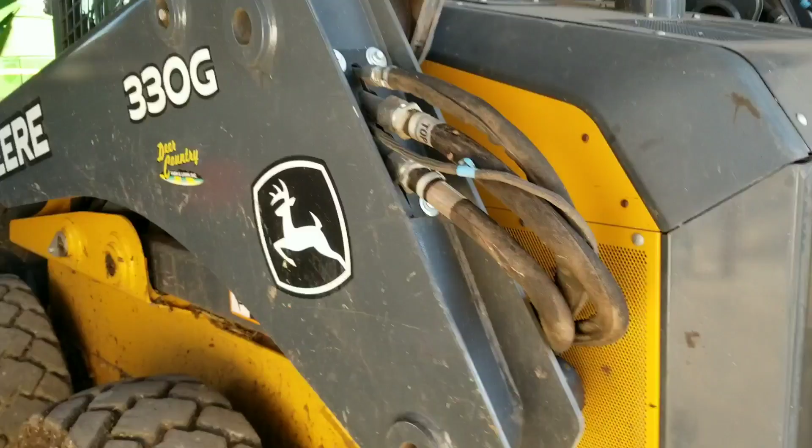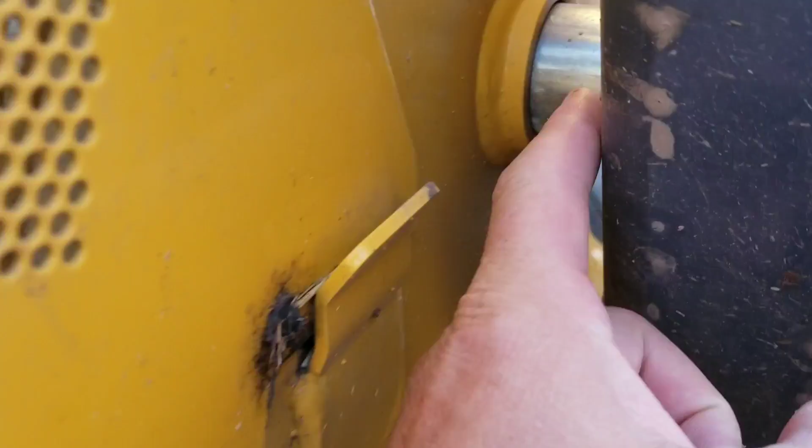Okay, this is all about the John Deere 330G. I have the loader way up, I have my lock on, and I'm going to show you how to take the shields off. We're going to blow it around here a little bit. The lock's on so it cannot come down, so we want to just take it a little easy there on safety.

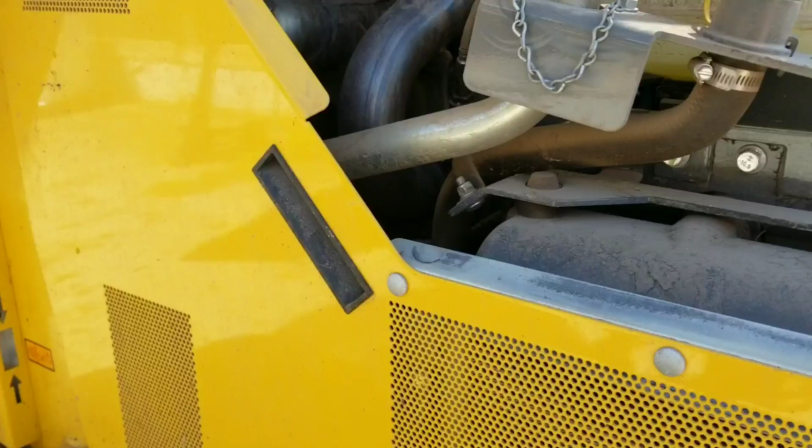So this is a handle here, I guess. We're going to pull that first shield off, see if we can locate the filter here. So you just want to grab that and pull it up. I don't have any help here right now, so I just have to pop it in and out.

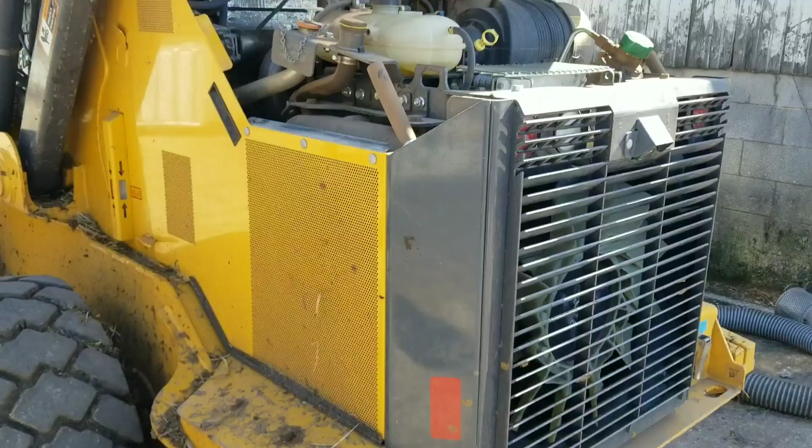So I hope you enjoy this video as we go along changing the engine oil. This is my first time doing this. It should have been done a little bit earlier, but as busy as we get around here sometimes, it's hard to get everything done.

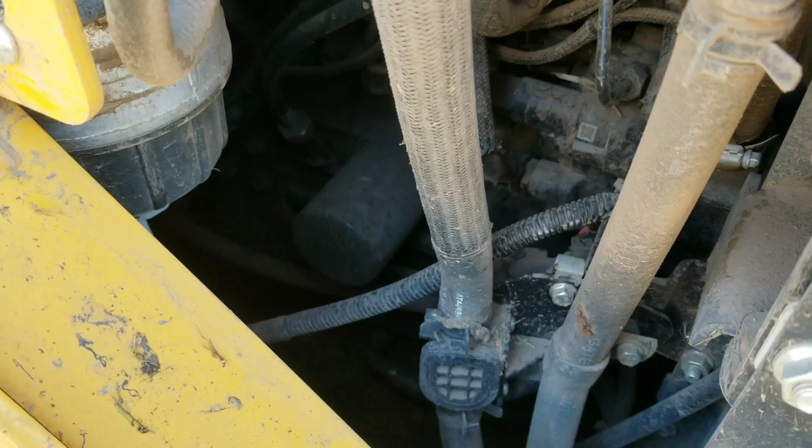Okay, you can see the engine oil filter there, it's right off the side of the motor. I'm going to remove the pan. I'm not sure where the engine oil gets drained out yet, so there's a fuel filter there, some kind of filter system there.

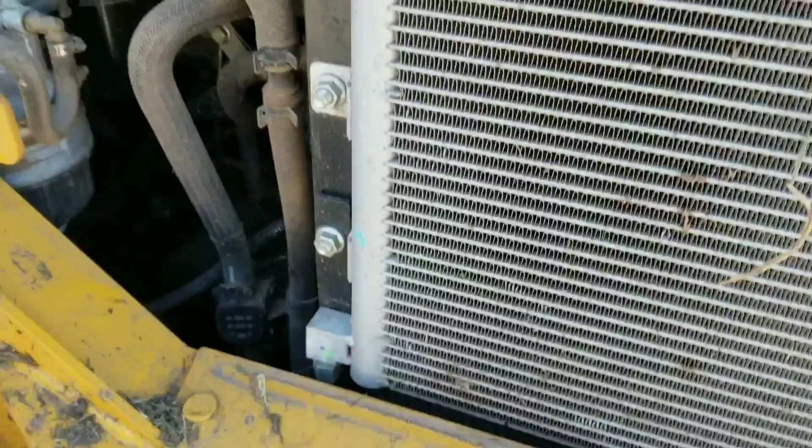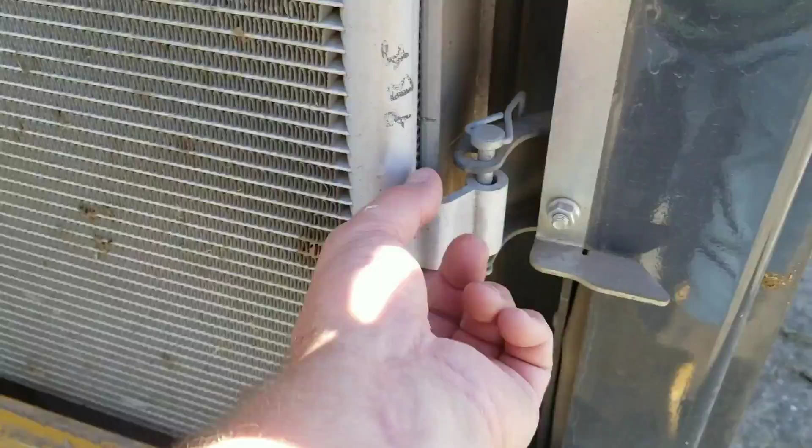Skid loader definitely needs a bath. So that was easy to figure out there, just take the shield off. It opens up nicely on both sides. These do swing out and stuff, there's all kinds of things you can do.

This shield here we take off to check up on a couple things here. I'm going to pull that one up too, just for any cleanup. Overall, that filter is not that hard to get to. Reach right in there, got lots of room.

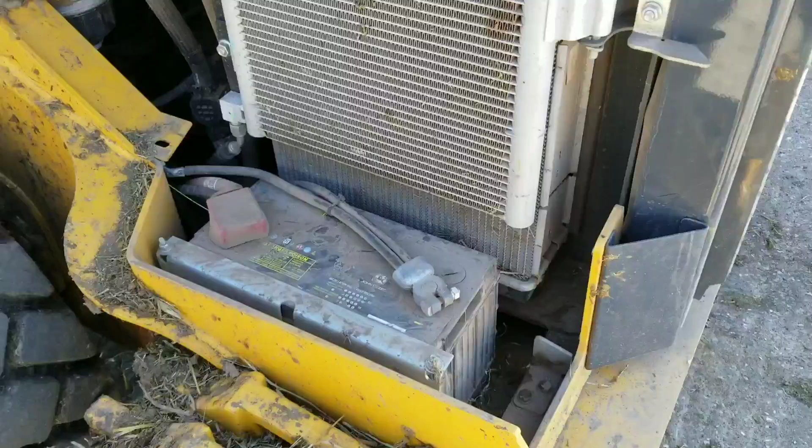So under that shield was the battery, and I'm going to blow everything off, clean up there real good. This is one where you can check and just unscrew these caps, check the levels. Being a newer machine, I don't think we need to do that yet, but we're going to go ahead and clean it up a little bit.

Get underneath there, see where we drain the oil out, underneath the machine here, and open it up.

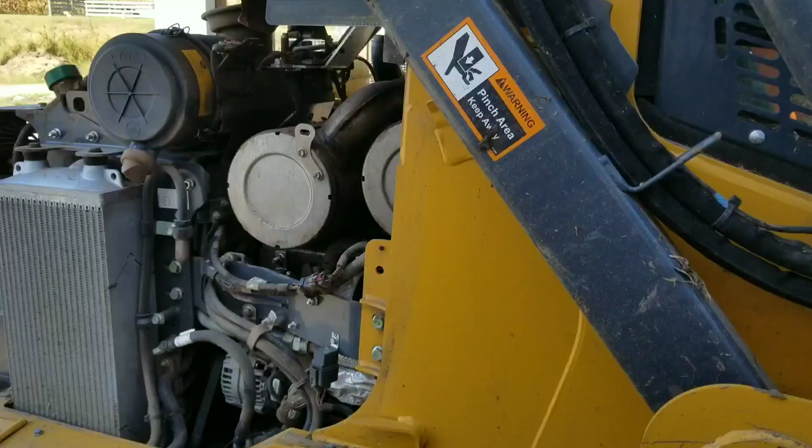Okay guys, I'll bring you back out here a little bit before I drain the engine oil. I did run it a little bit. This is my first time on this John Deere 330G skid loader, changing the engine oil, cleaning it up, blowing it out, opening it up, just kind of learning where everything is. Very interesting where I'm finding things.

Some guys would grab a book and sit there and look at it for a while. Not me. If it's just a simple oil change and I'm not doing big repairs, just cleaning it up, checking the filters and stuff like that, just making sure everything's cleaned up for the hours. They have a chart inside the skid loader that I go over for the things that need to be done at this hour mark, and check things out.

Have the air hose out here with cleaning it up. While we found the engine oil, I took the bottom oil pan off just to help clean out any extra oil that drips off of the oil filter. And here's the fun part.

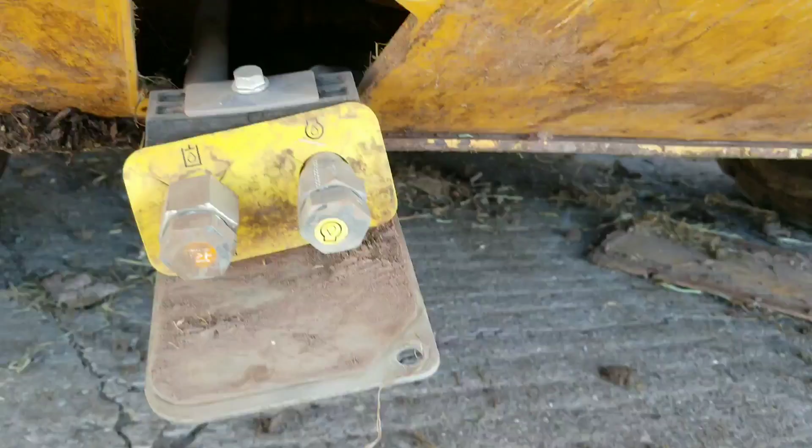You just pull these two screws out here, and you've got two drains. One's for the engine, one's for hydraulics. So everything comes out. I set my pan underneath there.

We're going to drain the engine oil out. Hydraulic has a square box, engine has a round one like an engine on it, so you know not to take one or the other one out. But it's simple to pop that off.

Get all your fluids out here. We'll let it sit for a while and let it drain completely out. And then I'll take some ether and clean up things so the oil doesn't stick in the dirt and stuff, and put it back in there.

So we're going to take this cap off. Get two box wrenches, yep, 15/16 to 24 - probably a 24, but a 15/16 should work. So I'll go get two of those in the shop, start draining engine oil, pull the oil filter, and get another drain to see if any oil comes out.

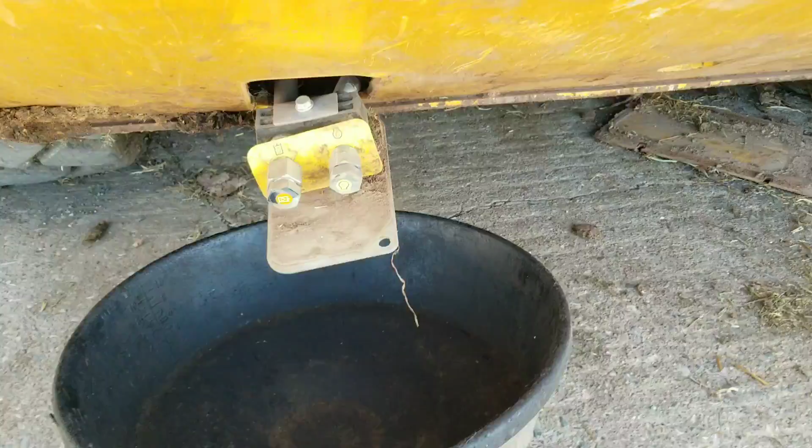The pan lays over there, I'll clean that up before we put it back on, and oil the bolts up and stuff so they don't get tight. Did blow the battery off, nice.

And then we can open a couple of these while we're waiting and just check. Like I said, I don't think it's necessary at this many hours, but here's where we want to put our engine oil in.

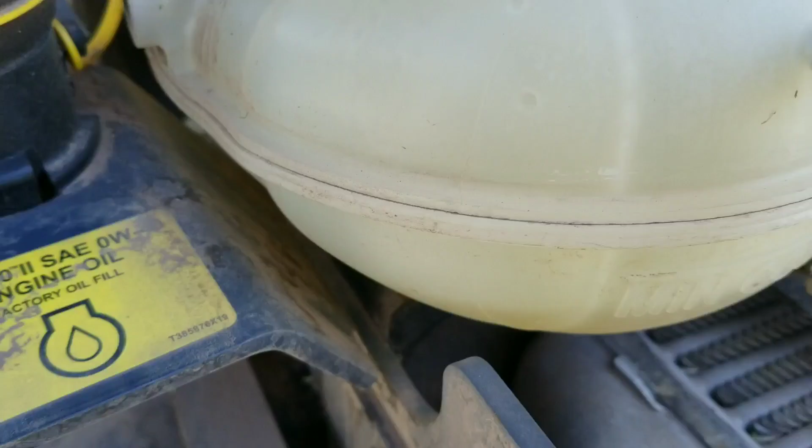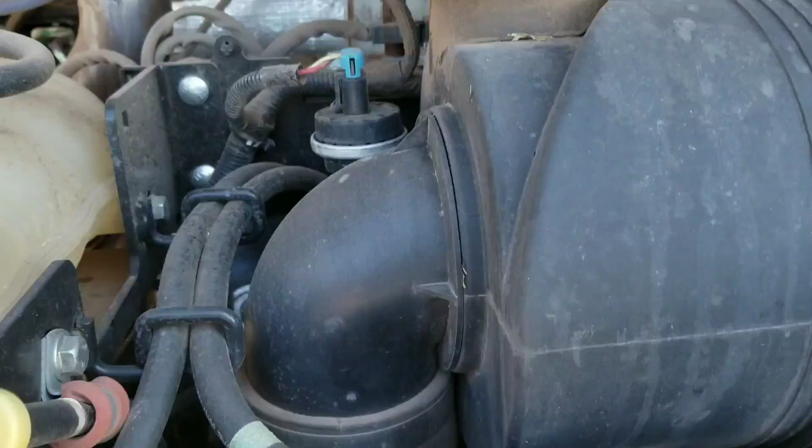And then they have the hydraulic oil fill right here. Everything's nice and easy to check. Here's the drain, or the dipstick, for the engine. But yeah, very, very nice to work on.

So let's get this draining for a while and we'll come back, talk a little bit more as the fluids come out.

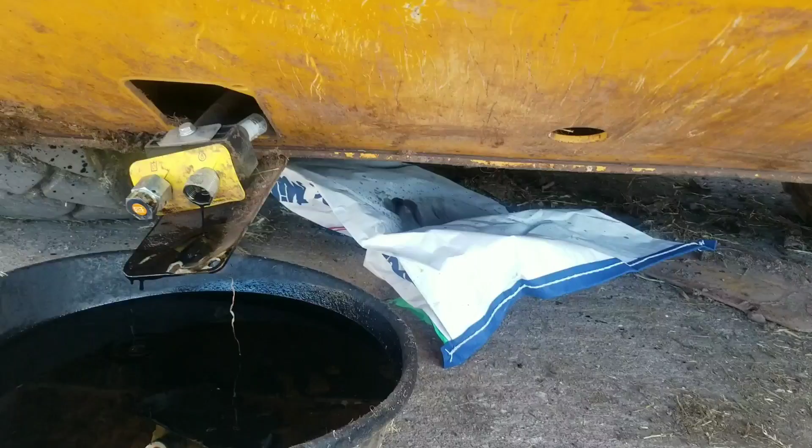Okay guys, well, we're getting the engine oil out. We'll let it drain here for about a half hour. Some people say it's not necessary, but I spend enough money on equipment so I can do what I want, I guess, right? Yep.

It doesn't hurt to get it all drained out of the pan. We'll put some actual clean oil in. Some say that's a waste of money too, but I got the new engine filter on there. You can't really see it there too good.

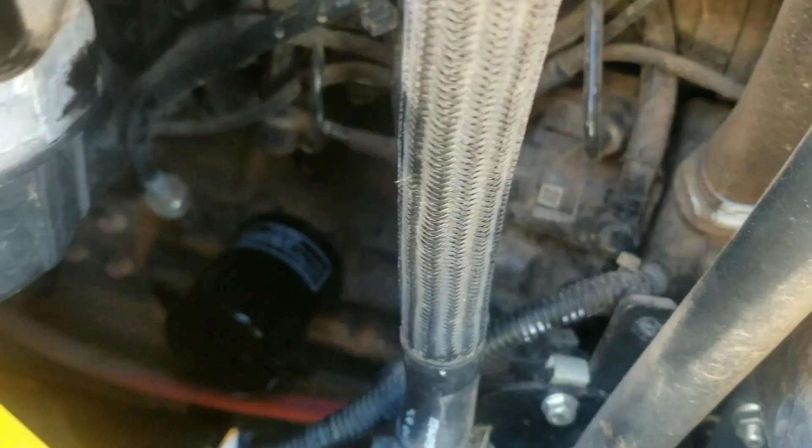I have this handy dandy little thing here. It expands for the filter, goes on there real nice. Has little magnets in here and holds it on. It was pretty tight.

This engine oil filter just says put some engine oil on the surface of the gasket, then turn it once it comes tight, turn one extra turn, which gives it about 20 to 24 pounds of torque on the filter. So, and then they say fill it up, check it again for leaks.

Some guys will put old engine oil on the seal. It doesn't say old engine oil, it just says engine oil, and it doesn't say clean oil. So, but we put clean oil on the seal.

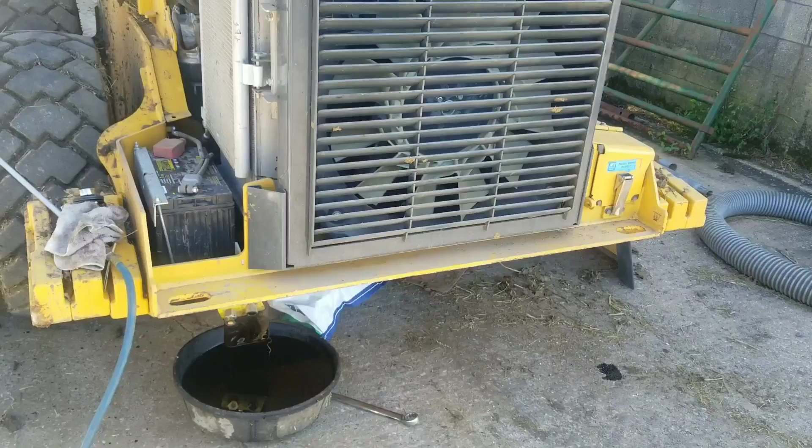And so we'll let that drain here for a little bit. Go get a tea, and it'll be about done draining. Then we'll put some fresh oil in it, just kind of flush everything out. Just dump it in there.

And again, I know some will say you don't need to.

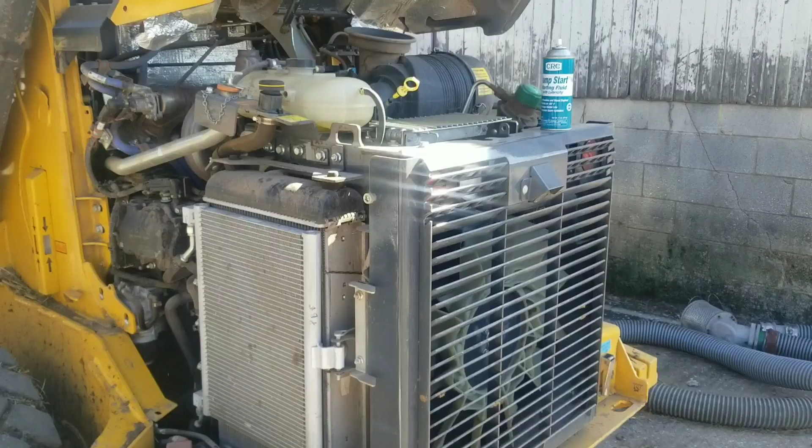So let's go get a drink of tea and come back, flush some new engine oil through it. Not much, a quart or something like that. And just the way I like to do things - I'm really fussy. Keep things clean, and it'll last a lot longer.

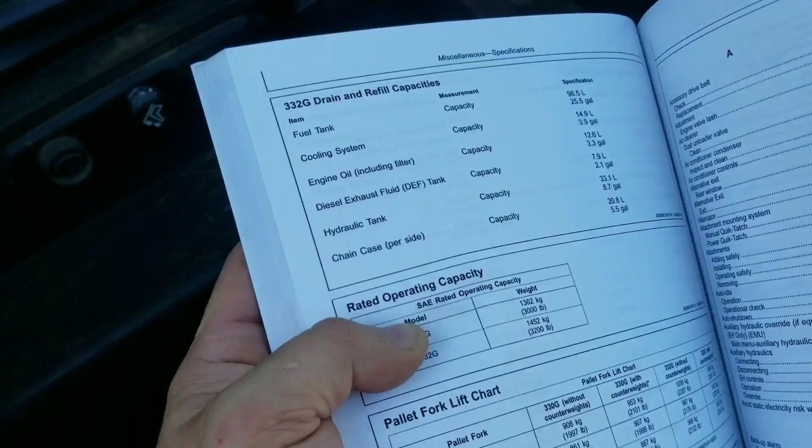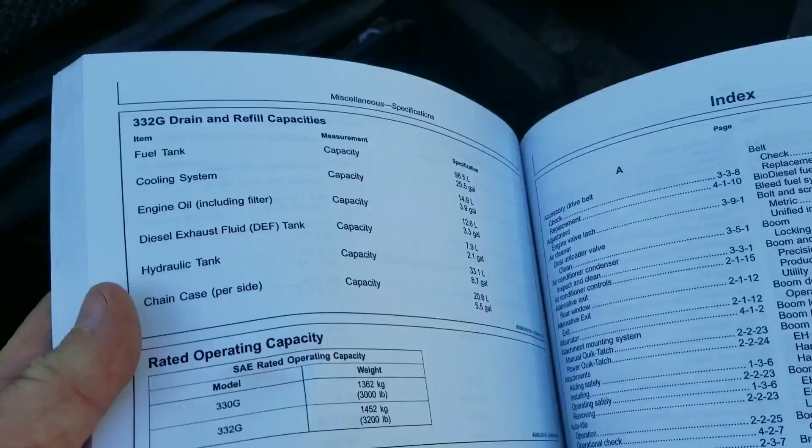Okay guys, sometimes you do have to pull the book out. I wanted to see what the engine capacity with filter is on this engine. The 330... the 332's capacity is 3.3 gallons. I gotta find a 330G.

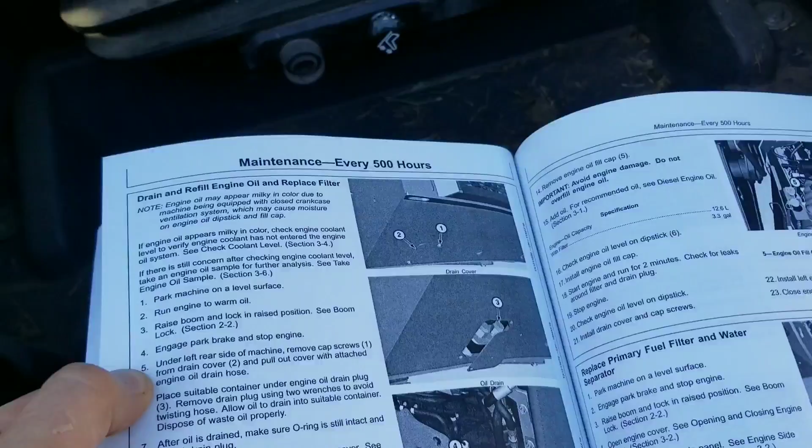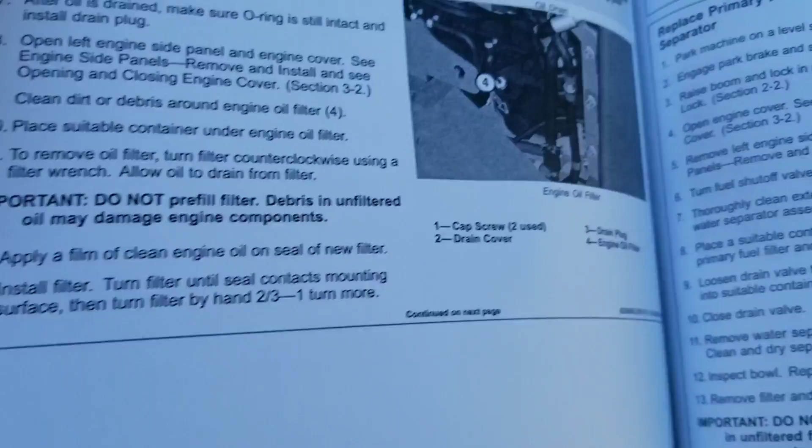So in the book, maintenance every 500 hours to change the engine oil. They tell you to remove that plug - there's the drain plug, drain it. Pretty much what I figured out on my own. There's the fill and the check. 3.3 gallons. Let's see here.

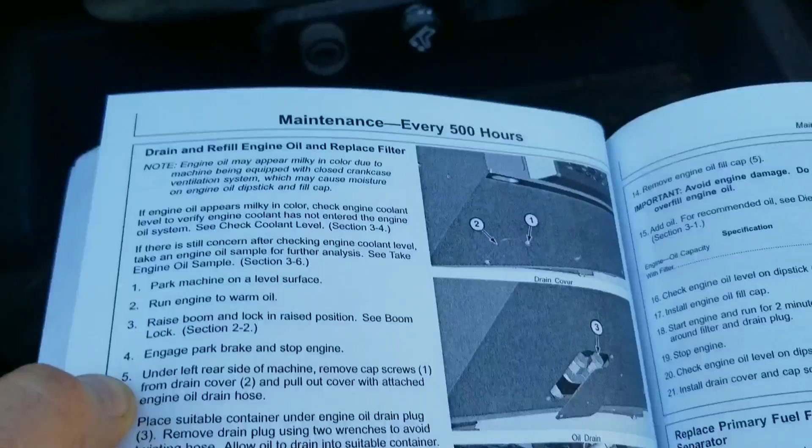Pretty much figured it out without pulling the book out, other than the 3.3 gallon for the engine. So we got that. This all goes behind the seat, and until we need it again.

I got my buddy out here helping me change the engine oil. Can you wave hi? He figured out how to push himself around. He's smart. Hey, where you want to get your hands into, Punky? Mom. Where's Mom? I have no candy for you.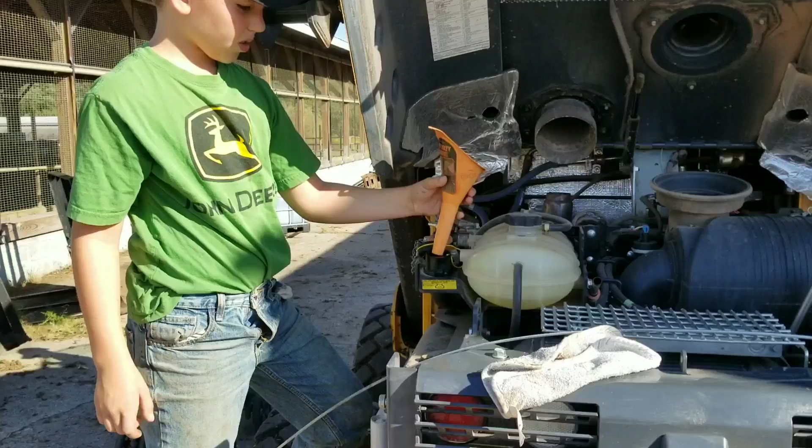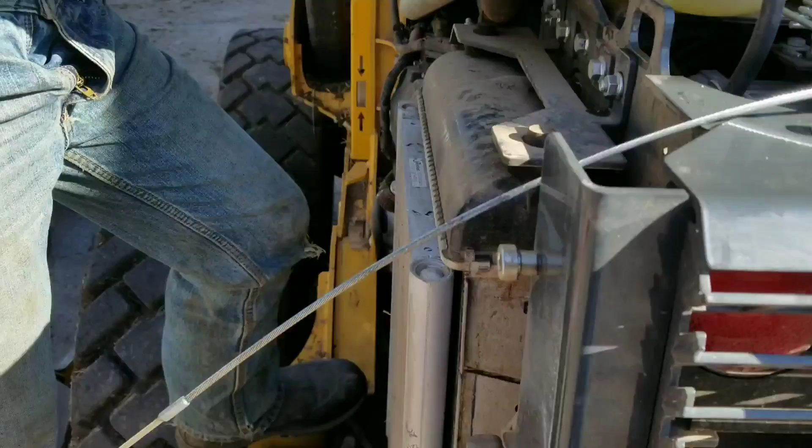All right, let's go back and clean up and then get ready to put the engine oil plug back in. We got 2 gallons in there so far. I have these brand new 2 gallon jugs, so I need another gallon and a little bit, so I'm gonna put a half a jug in. We'll go ahead and check it. I do not want to overfill it. We want to keep it in the operating levels there. Full's right there.

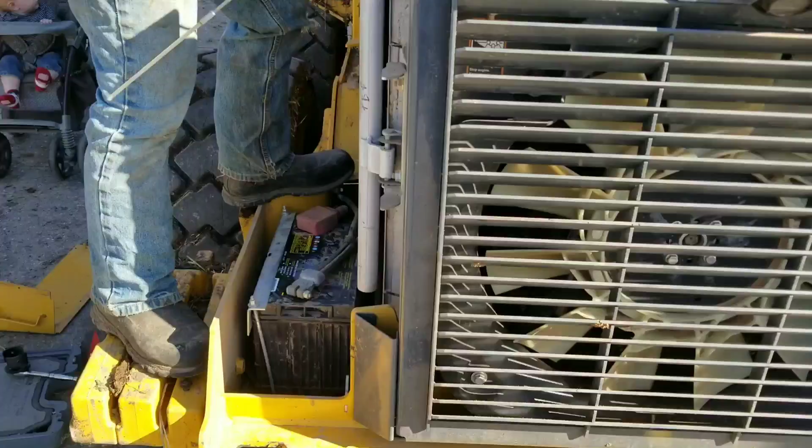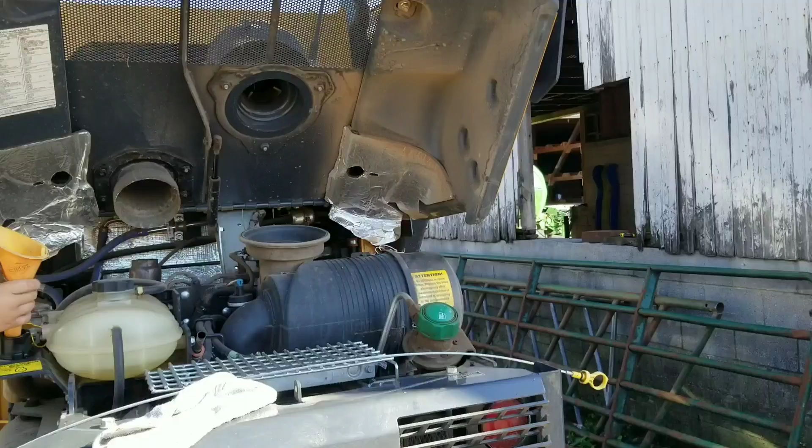We'll have to run it and then let it sit and then check it again. So if it does get overflowed, then we got to take the plug and drain a little bit out. It's easier to keep adding a little at a time to make sure you get your exact amount. I do have a jug to put it in to measure it to get it. This just keeps the oil clean and not going into other containers.

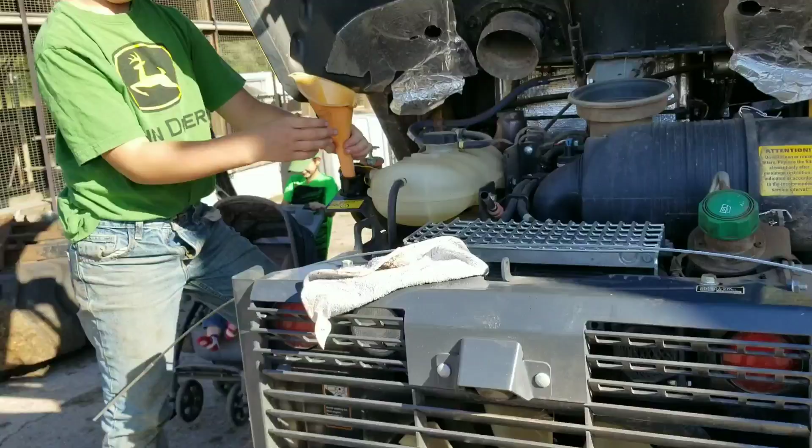So I got my boys here. They all came home from school and wanted to see what's going on. All right, let's get this oil in. Guys, he just put my books back for me, and he can put the seat back. Make sure you don't get grease on yourself.

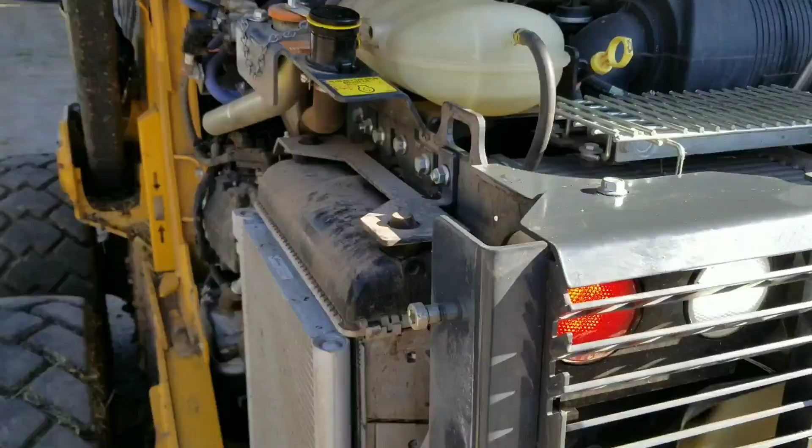So this is the first start up, and then what we'll do is just let it run for a little bit. I can look at the oil filter, make sure that's not leaking. The drain plugs are nice and dry down there. You don't need to run it very long, it's just one of those things. It doesn't take long to get the oil circulated in the filter. Feel the filter getting warm.

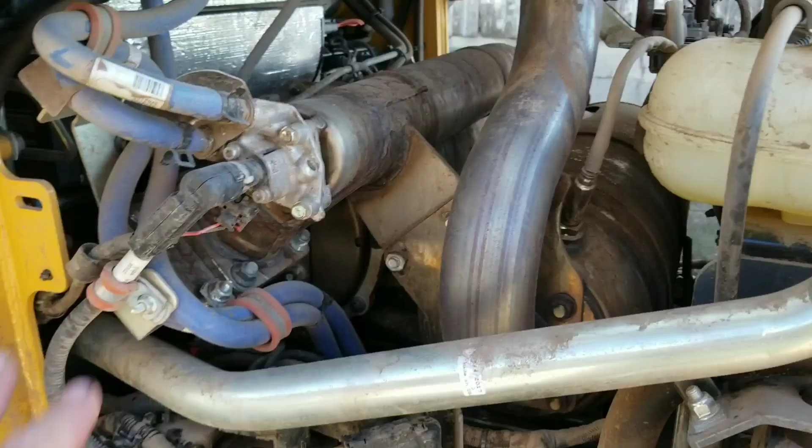This is all the DEF system here, so it takes a lot of room there in the engine to have all that stuff in there.

So we'll go ahead and shut it off and then come back a little bit and check the engine oil. Again, the locks are on, so we don't need to worry about anybody getting hurt, and you just need to be sitting in the seat to start it. So let that engine oil settle down here a little bit. It's much easier to wait and check it and then see if we have to add a little bit.

So overall, I would say this is probably a 1 out of a 10 rating... this is probably about a 9 to change the engine oil in the John Deere 330G. Very easy, doesn't take that much tools.

You really don't need to drop that lower bottom pan at all, but I do, because you're going to have a little spillage, and it'll go right there. We have a bag down there, I'll show you that. I took some ether and cleaned off all the stuff and make sure nothing can stick to it. Ether does an excellent job just to clean off your tools and stuff. And you can see it's on the bag. So we can roll the bag up, put it in the bag, and then dispose of it.

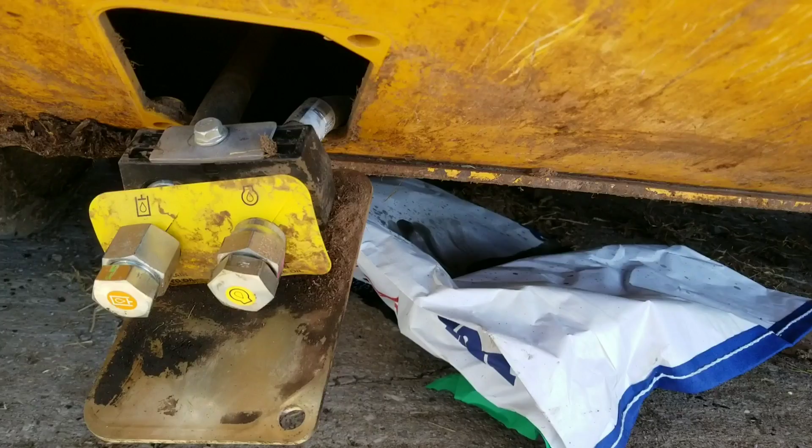I'm going to clean this bracket here a little bit more before I put it back up in there, but I'm going to do that here shortly. I get about a 9 for easy and accessible, and the shields slide off real nice.

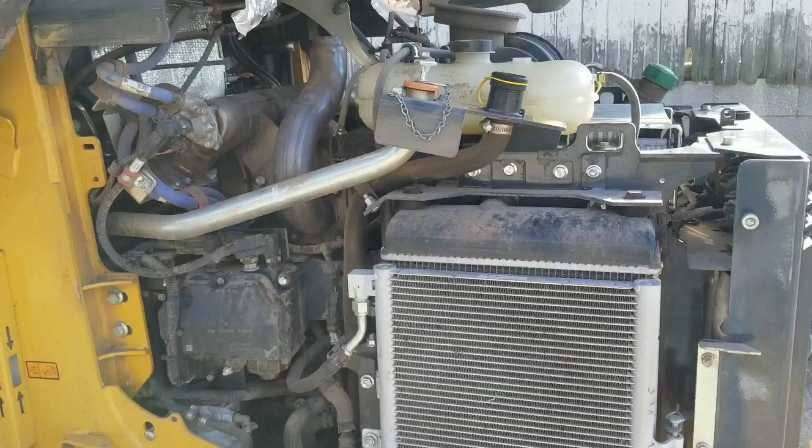Hope you enjoy this on changing the engine oil with my son, and finish up here, and we'll get him to put it to work. I know there was a request for him to see more video getting stuff done, so we'll try to get him doing some dirt work.

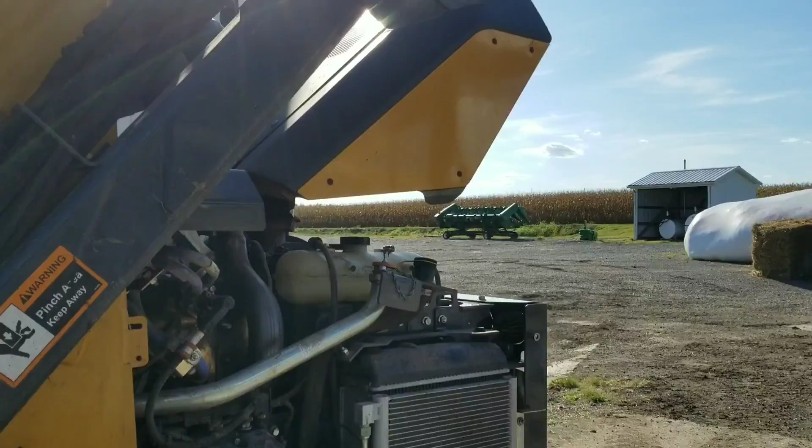I do grease the cylinders and everything pretty often, more than they need, but once you get play in these, it's no fun, so it's better to keep everything serviced. Hope everybody has an awesome day, and we'll talk to you later.